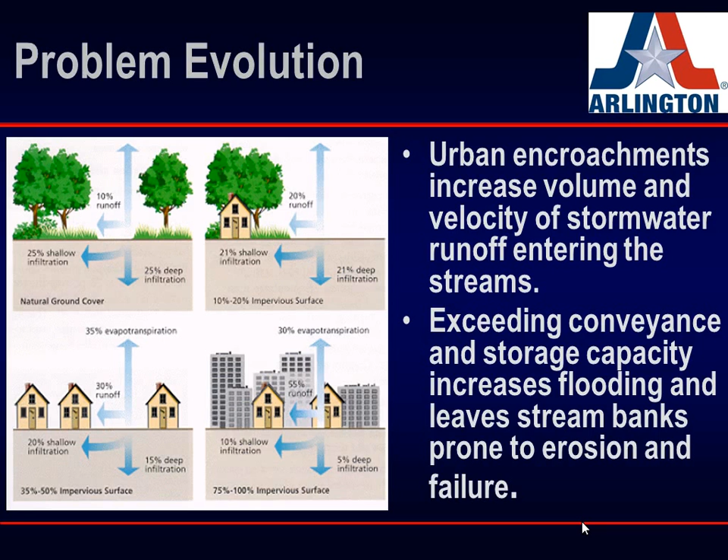So a lot of what has happened with our systems has really dramatically changed based upon the changing land use information. This kind of sums it up, how things are happening and why they're changing. The other problem is this is quote an improved stream in the City of Arlington. For a long time, we were very efficient at concreting everything. So what happens is, for those of you who remember hydrology, you speed up the water, you get more volume, it changes the response of the system.

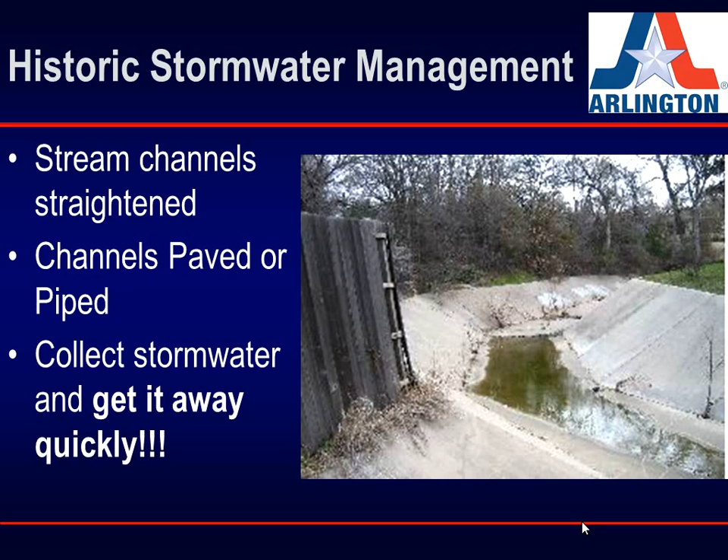So what we deal with a lot is that a significant portion of our streams in the City of Arlington were paved at one point. The idea in those days was get it gone before the flood wave comes through. Well, what we did is we sped it up so much that we had all the peaks hitting simultaneously on the main stems, making things a lot worse. Plus it led to the degradation, the erosion, and a lot of the other issues we're dealing with.

A good example of that: you look on the left, that's an area in Arlington in 1962 and 1976. There's a little bit of urbanization there. You can see a lot of houses, and that was just in a couple years' span.

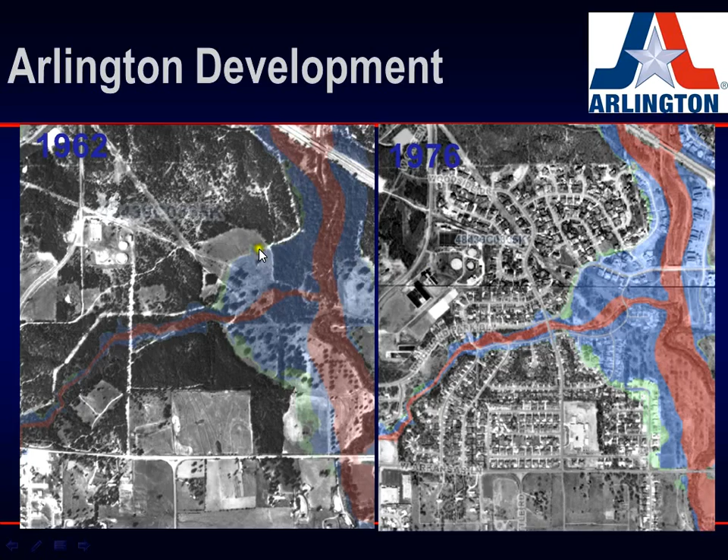Here's another example, 1976 versus what it looks like in 2009. Obviously, with the significant amount of increased imperviousness, no updates to the flood studies and everything else, we've had a lot of things changing - the flooding has increased, the water quality has decreased. The streams aren't real good about supporting any kind of fisheries anymore, and they're loaded with trash. Now that has something else to do with it because people like to dump their stuff out there, but it's not a very aesthetic aspect of a community, and people really don't like what it looks like now.

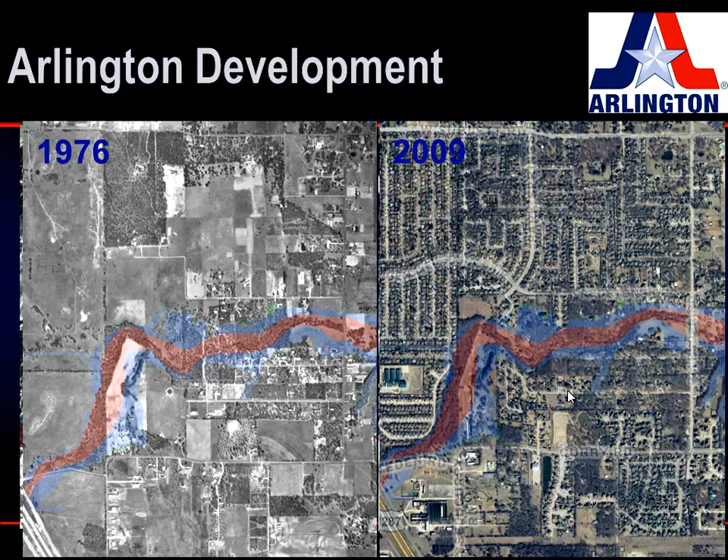So one of the things we're left with is trying to make that better. Another example here: straightening of the stream channel versus a section that wasn't developed. Ironically, the section that wasn't developed is on the Arlington Airport.

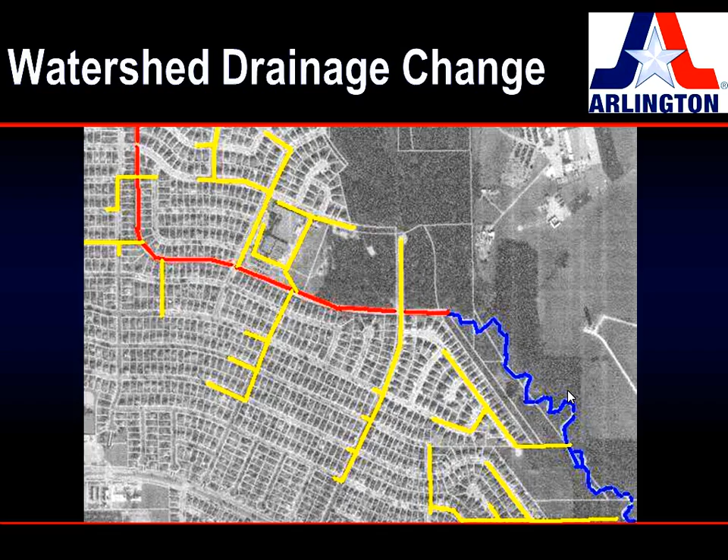But then when you add in the other aspects of it, all the storm sewers accelerating the water, we really get that water there fast and speed it up fairly well. So one of the things we're trying to deal with is slowing it down so it doesn't cause problems and flood places.

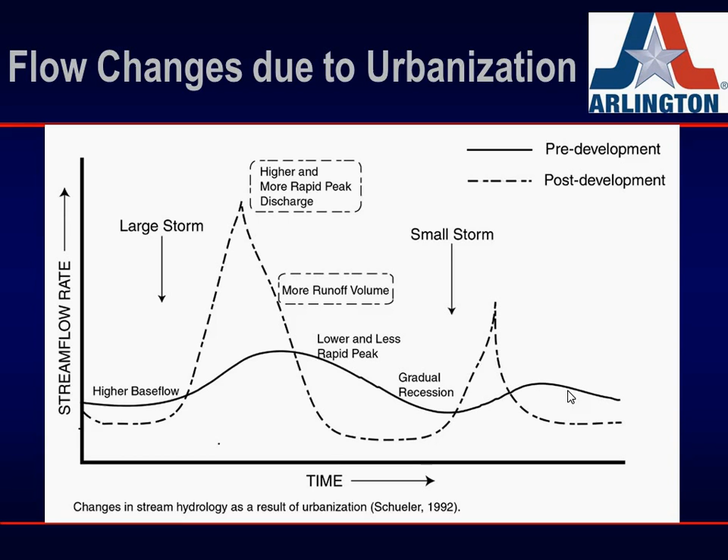There's a famous presentation from Schueler out in Maryland from 1992 showing how the hydrology changed. For those of you who remember your hydrographs from hydrology class, the solid line is what it was pre-development, and the dashed lines show what it is post-development. So you get into peaks earlier, they're higher, and they cause a lot more potential degradation to your systems.

So what do we do about that? Well, the traditional method, like I talked about earlier, is to convey the stormwater and get it away from the site as quickly as possible. We're now being forced to do things in a little more of a green fashion.

People like, and green, I always laughed about it. Somebody told me years ago, let's just spray paint the concrete green. Well, some people may like that, but citizens tend not to. It's funny, about half the citizens who call me now want me to concrete the universe, and the other half want me to tear out all the concrete. So I'm left in this no man's land of making neither group happy, which means I'm pretty much doing exactly what I'm supposed to be doing if nobody's happy.

One of the big issues is we've got to change the mindset of using stormwater as a resource. Most of you who have sprinkler systems in your yards know they've basically started limiting that. A lot of it is we either have way too much water or it doesn't exist. So changing the mindset to get people to view water as a resource, something we can utilize and retain as much as possible, is one of the things we're trying to integrate into our designs.

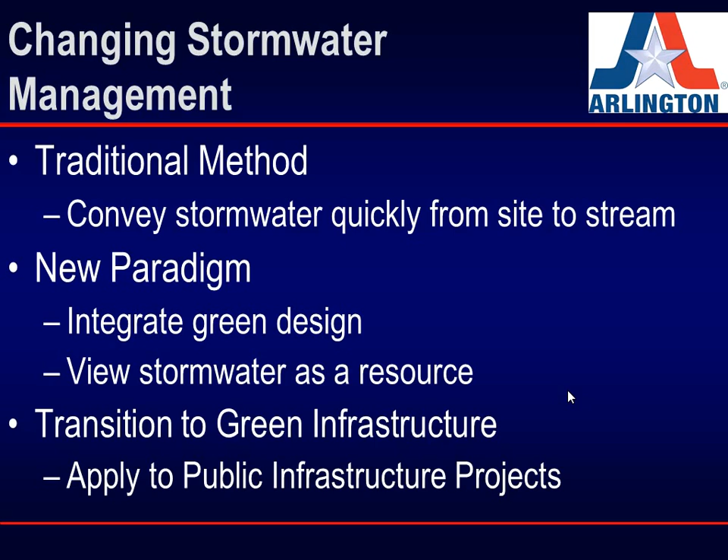We've been requiring that of the development community for a decade or longer, so now we're under the gun to start looking at it from a public infrastructure standpoint. I always laugh about it - somebody said, you guys don't do what you make us do. I said, yeah, we're kind of like parents - we tell you what to do and then do the exact opposite. So we're trying to move into that realm where we lead by example rather than just telling you what to do.

One of the infrastructure considerations we always run into, especially in stream channels and erosion issues, is everybody generally says concrete and gabions are the solution to all problems. There are a lot of times when they are a good solution, but they aren't the end-all. So one of the things we've started to look at is whether it makes sense to use them, or if there are other alternatives we can utilize. I'll give you an example here a little bit later of what we did.

A lot of times people only address the flooding aspect of things, but if you're addressing flooding, you can improve water quality. Likewise, if you're addressing water quality for your EPA or TCEQ permit, you can do things that will potentially have minor reductions in flood risk. If you look at things incrementally, every little bit counts - every bit you take out of the system or slow down will help keep things from getting worse.

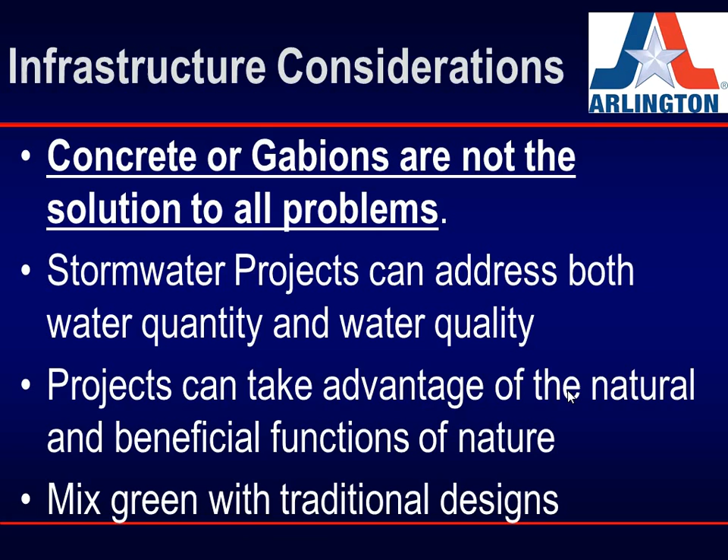So one of the big issues is, well, you can't do it all. Yeah, that's right, you maybe can't do everything on your design. So we have mixes of traditional versus green, and we start to integrate things slowly. These are some of the things we take into consideration.

I'm going to go through a couple of examples of what we've done in the City of Arlington over the last 2 to 3 years. Meadowbrook was a channel rebuild project, basically an old concrete channel that had heaved up because it was built on expansive clay soils. I did learn one thing 30 years ago when they built concrete channels in Arlington - there was this novel concept of engineering design that left out steel.

We were tearing out those concrete channels. I couldn't find any remnant of steel anywhere, so it made a lot of sense why they buckled and went the way they did.

One is River Rock Circle, a bank stabilization project to protect infrastructure. I got a really beautiful picture of a 20-plus inch main that's hanging in the bank, ready to start discharging into the creek.

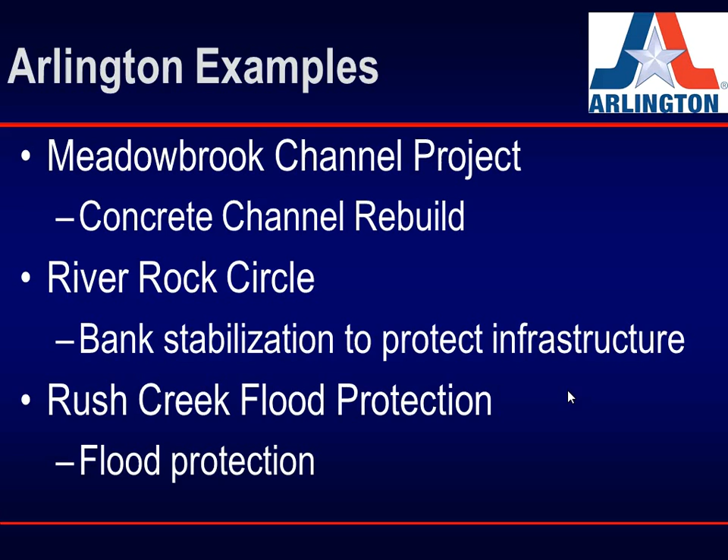Then the Rush Creek Flood Protection Project, which is a flood protection project. The first one is the Meadowbrook Channel, as I talked about, a failing concrete channel. It had flooding concerns. One of the things that happened is the concrete channel started heaving up and going every which way. It's supposed to be a nice trapezoidal channel, and I'll show you some pictures here in a second. Remember, it was supposed to be trapezoid, so that gives you an idea.

We've got a lot of these in the City of Arlington, but this is one of the worst ones we dealt with. One of the design challenges was confined space. We only had a certain amount of easement, and those of you who've had to go out and acquire easements from 40, 50, 60, 70 property owners know the horror of dealing with a project like this. So we were basically confined to the space we were dealt.

But one of the things we wanted was to find some type of water quality benefit. With all the other facilities in the City of Arlington, Jerry's, Big Dome, and the stadium, Globe Life or whatever it's called this week, based upon checks, a lot of things they're trying to do is make the place look better. So we had a directive from our city manager that we wanted it to look better.

One of the main reasons we want things to look better is concrete is a beautiful canvas for artists, and they like to paint it. We spend a lot of time out there with guys with white brushes painting over it, so it's a nice clean canvas for them to paint again. So we were trying to look for designs that were less appealing to them for their artwork.

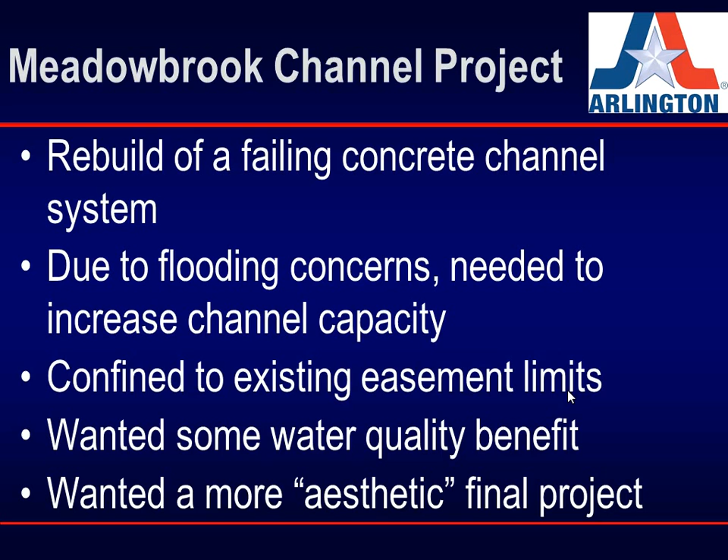These are all some of the things we had to start taking into consideration in our design. As I indicated before, this is the Meadowbrook Channel pre-development. This is actually one of the good sections where we could still see it, and it hadn't completely heaved. I did like the quick fix on the left side of the picture with the corrugated metal, God honest truth. If you look on the right side, that was supposed to be a 45-degree bank the other way, but it's heaving over.

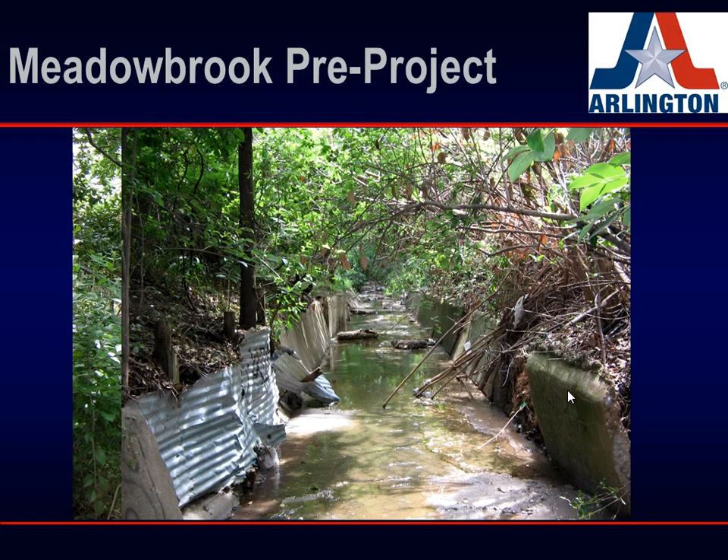So that gives you an idea of some of the issues we were dealing with from these channels over the years. You can see the ever popular solution of bag wall construction on the right. These are all things that were historically done to try to stabilize and maintain the channel.

What we ended up coming in with is a block wall. The reason we went with that design is we needed to maximize conveyance capacity. The channel was grossly undersized. We had limits to what we could do, and we went to the limits of what we could, basically maximizing the size of the cross section so we'd get the most flow through there.

But the one thing we changed up is if you look at that bottom, those are interlocking blocks. Under low flow scenarios, none of the water flows in the channel, it actually all goes down and infiltrates in. It's interesting, when the concrete section comes in, we get a little trickle of flow and it disappears. The other aspect is the blocks themselves have gaps and openings in there.

Now we put rock and sand in there, but one of the things is it starts to fill in with a little bit of soil. And those of you who know weeds, because they grow up right through every crack in the sidewalk, we had factored that in, and that's what we were planning on, because we were trying to get a bit of a green feature in there so we'd have vegetation to filter out what we could, but also catch things, work as a filter, and green it up a little bit.

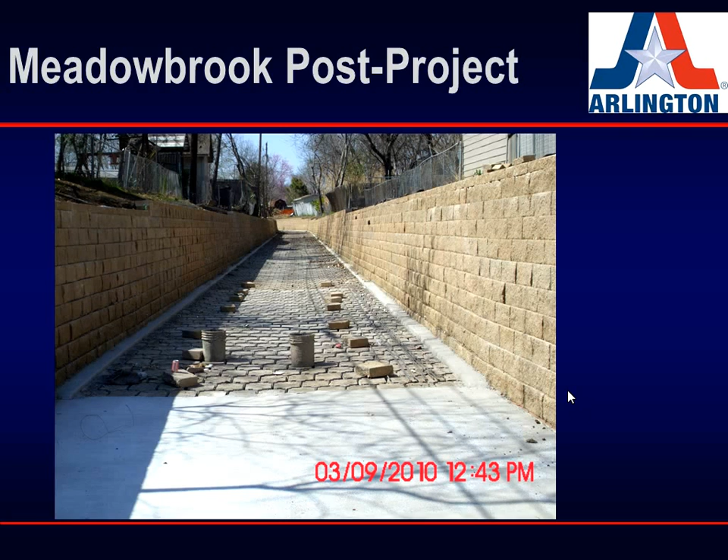One of the other reasons we talk about doing this is it makes it less appealing for people to travel down, especially those who like to walk down and climb over fences in the backyard to visit homes. So if you have it where it's not appealing for them to crawl through or walk down the channels, that was a good thing, and the police embraced that kind of concept.

Here it was earlier this spring when the grass is starting to come up, not overwhelming. We will go through there once a year and mow it down a little bit, keep it at about 2 foot high, but it'll continue to grow up.

When we have a flood event or any kind of stormwater event, the water just comes through and knocks it down. Looks like any other ditch in the Metroplex or across the nation. The water pushes it down, and two days later it's all standing back up again. But we get that filtering effect, a little bit of infiltration in there, and it does help, at least from a water quality perspective, handle the normal low-end flows.

Here's another thing: you can see how close the homes are encroached in there, which gives you an idea of the constraints we were dealing with here. Now, there were a lot of people who wanted us to put it in a box culvert. Well, cost-wise, that was kind of prohibitive on our part, so we rebuilt this. This came out to be essentially the same as we would have paid for concrete.

So for the aesthetic aspect of it, we figured out that people don't like to spray paint these walls. It messes with their artwork, doesn't give them that nice smooth canvas. Plus, we get the water quality perspective, and we get a small amount of infiltration going back into the groundwater and into the soils there, so it does help stabilize it a little bit.

Another project is River Rock Circle. This is a severe erosion near a sanitary sewer. There was a previous Gabion project there that had failed, and it was only three years earlier that it had been worked on. One of the big issues, because we were exposing so much of the line, was we were worried about 404 permit issues. Anytime you're dealing with over 700 linear feet of a creek, the Corps gets a little cranky.

Who hears from the Corps? Okay, I can badmouth them all I want. One of the big issues is we were trying to avoid a Corps permit, an individual permit. We didn't want to pay for mitigation. We were already paying for enough. We didn't need an additional cost to pay for somebody else.

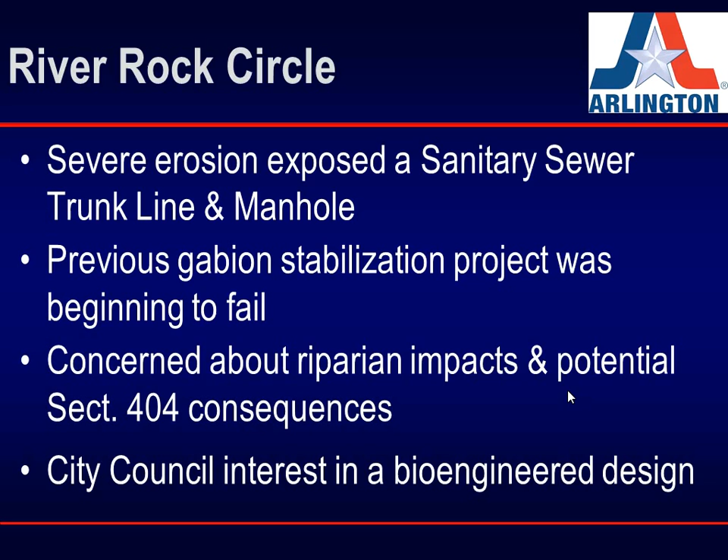The other thing is the city council there had one member who was really excited. She wanted to see a bioengineered design, she was demanding we do a bioengineered design. So we had political support, which is usually the thing that basically kills most of these efforts. We came up with a solution, a design, and worked through it. It was a design build option. We're allowed to do two of those per year under special circumstances, and that's what we went with.

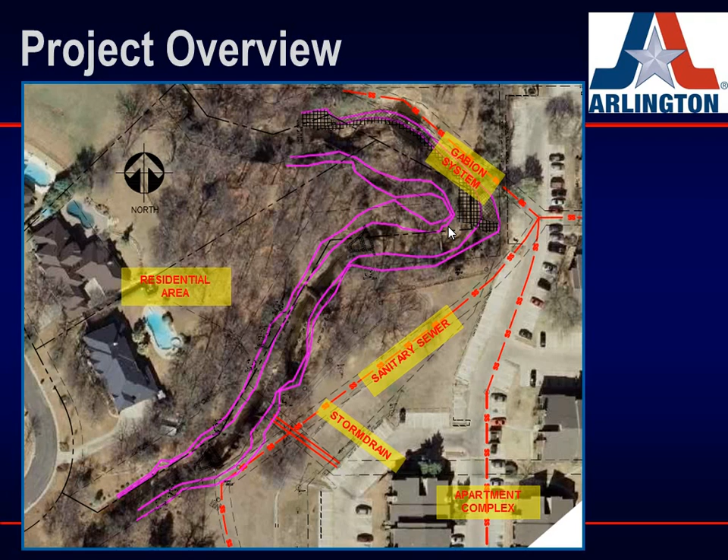The reason we went with it is, as I look here, the creek was kind of a unique situation. This red line right here is the sanitary sewer, and you'll notice the encroachment of the channel itself. We also had a storm sewer outfall coming in here, and this is the area that had previously failed, so this was starting to fail again. We were trying to identify and basically stabilize this whole corridor in this hairpin curve, so to speak, and come up with a good way to stabilize it that was green, that was stable, and wouldn't have the continued issues we were dealing with.

This is what we started with. Beautiful, isn't it? Now, most people, it's not real clear here, but this apartment complex here, the fence up there, that was their third fence. The other two are somewhere down the Trinity because they fell in and just flowed on down. So they weren't real happy with us about the status of the creek.

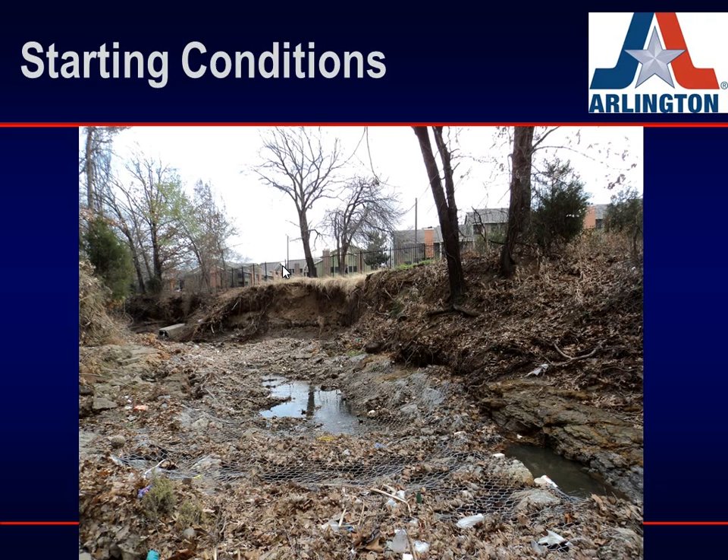One of the issues is it keeps coming closer and closer. Now, if you notice here, another angle of it, but see this little red blob right there, if you can see it? That was a 27-inch sanitary main, and just to the right of it was the manhole. That's why we were getting concerned, because we felt if we lost any more of the bank, it was hanging there, and we were afraid it was going to buckle and start discharging straight into this tributary.

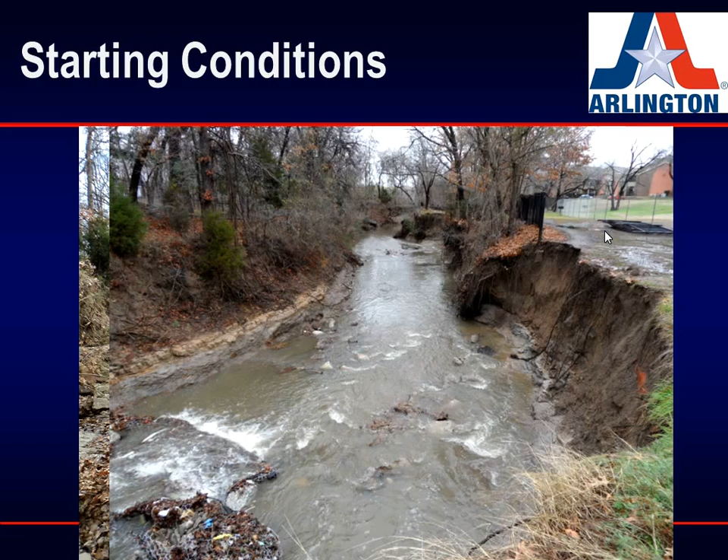People get cranky whenever stuff shows up downstream. They don't like seeing toilet paper floating in creeks, it's just something they're kind of irritated about. So we were trying to avoid that. Again, you can kind of see the fence here; this is when they lost more of it. So this is a situation we're trying to stabilize and deal with. How do you deal with something like this? Traditionally, you come in there with gabions and go to town, piling rocks like there was no tomorrow.

We came up with a different idea on how to do that. As we were moving along, we kept eroding away. You notice the line here starts to become more exposed. In the interim, we put a lot of riprap right at the toe, tried to stabilize it under low end so we didn't completely lose it. But we were in that design realm and had to get permission from the Corps.

This gives you an idea of the before and after aspect. You can highlight the tree there - the left one is before, the right one is after. I won't go into the gory details of the design itself, but the neighbors and people in the neighborhood were ecstatic. They thought this thing looked great.

There were a lot of unique features about it. We stabilized the soil using earth anchors. We did a lot of interesting things to it. But one of the things that helped out is when it was done, it's green. And that's all they wanted - they just wanted it to look semi-natural.

Now granted, no stream is that perfect slope like that, but if you look here you can see the little plates - these are actually earth anchors with plates. We have a geotextile mat that's got openings in it so grasses can grow through, and it's anchored in there with deep anchors. So it's structurally sound, it's tied in there tight.

We also used limestone blocks cut specifically for our situation to create a series of drop structures or weirs so we can handle the grade and slope of the channel. Rather than having that shooting down, we have a series of cascading pools. It worked out fairly nice in that aspect.

This is probably the best example of the cascading pool in operation. The thing has taken some fairly heavy flows - we've seen water over this weir about 4 feet deep. We haven't had a real big storm yet, but we've had several good enough to show that it's fairly stable.

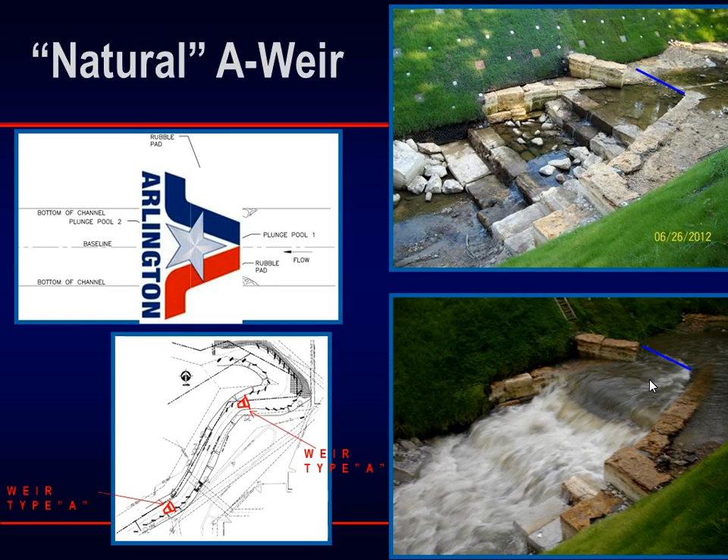Now, the one thing about this natural A-weir is one of my engineers, she took great pride in this design because of how it looked out - being the City of Arlington, it matched our logo. So you can have a little creative aspect of your designs and put a stamp on for the City of Arlington in that sense. The problem with us now is they're changing our logo, so we're going to have to potentially redesign these in the future.

Again, before and after, so you can see how this thing works out. There are a lot of features that were taken into consideration, but when it was all said and done, it was kind of greened up, and the neighbors liked it. The irony about this one is there are 3 city council members who live in this neighborhood, and all 3 were very intimately interested in this project. All 3 had high praise.

So usually whenever stormwater, we're the bad guys because everything we do causes problems - erosion and flooding and everything else. We were on their good side this time. We gained credibility over it because it was something that looked like an asset to the community and to that neighborhood.

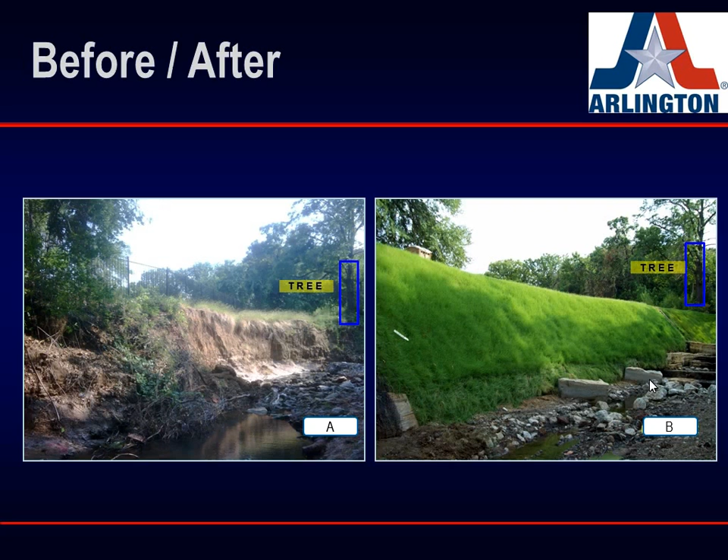Some more pictures - again, you can see the earth anchor blocks. They give you an idea of how the thing was stabilized. One thing is you go out there today, and we've given a lot of tours to a lot of municipalities and various groups in recent months, and over the last year.

Every time we go out there, you see fish, and much to the chagrin of some people, snakes, and turtles and everything else. So we are getting a fisheries and a natural community growing back in that stream that was not there when we started the project almost 2.5 years ago.

One of the big benefits is it's kind of natural, but it's engineered natural. So it does stabilize and will withstand a lot of erosive forces. We do have to occasionally do some minor tweaks, but we haven't really had to do much of anything over the last 2 years since this has been put in. It's much more pleasing to the people who like to see things more grassy than concrete. And if you spray paint this channel, we don't worry about it - we just mow it down.

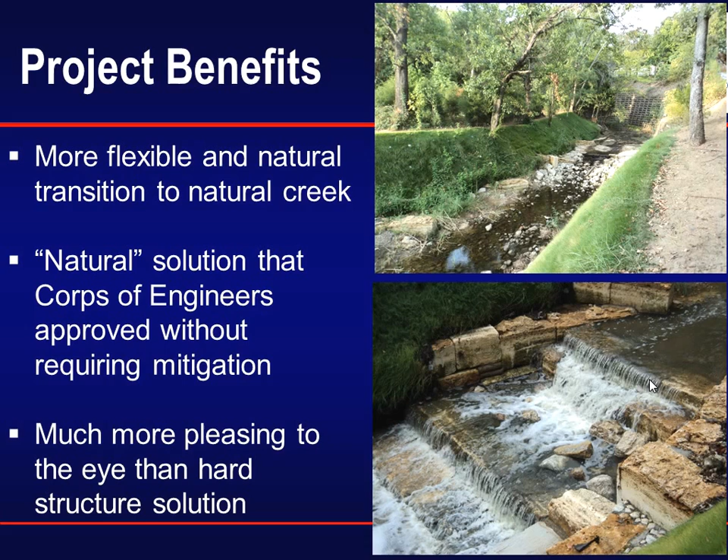One of the big things people talk about with green design is that it's much more expensive. When we got all said and done, we did the original design of this design-build, and it came out to about $1 million.

We had some changes because we had a flood event that made us change our design, since we lost a lot of soil and had to buy more material. Final comparison to Gabions, which is what we were planning to do, showed we were about $100,000 cheaper than a Gabion design. So on this specific project, not to say all of them will come out this way, we were about $100,000 under what the Gabion design would have been. So from our situation, it's probably about the same.

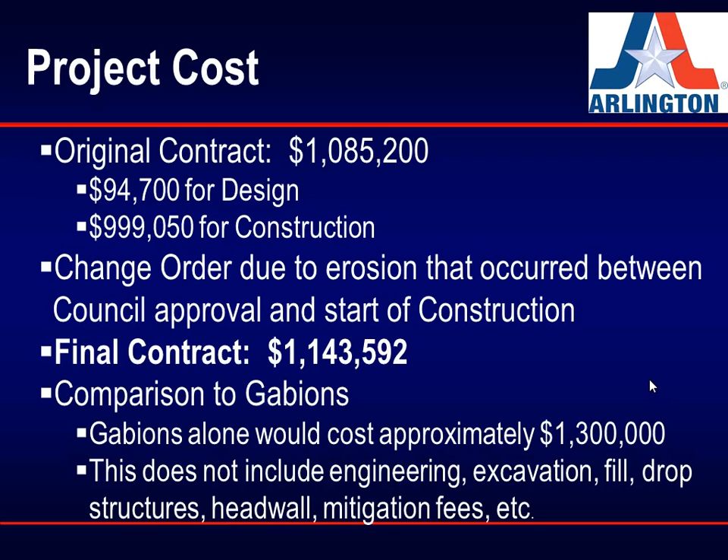Rush Creek is an interesting project because it was an area of historic flood losses for several years. We had done several studies to look at this area. Who here remembers Hermine in 2010, and Fox News with the helicopter over the apartment complexes and condominium complexes in Arlington, and me thinking, I don't want to be anywhere near there because I don't want to be on Fox News.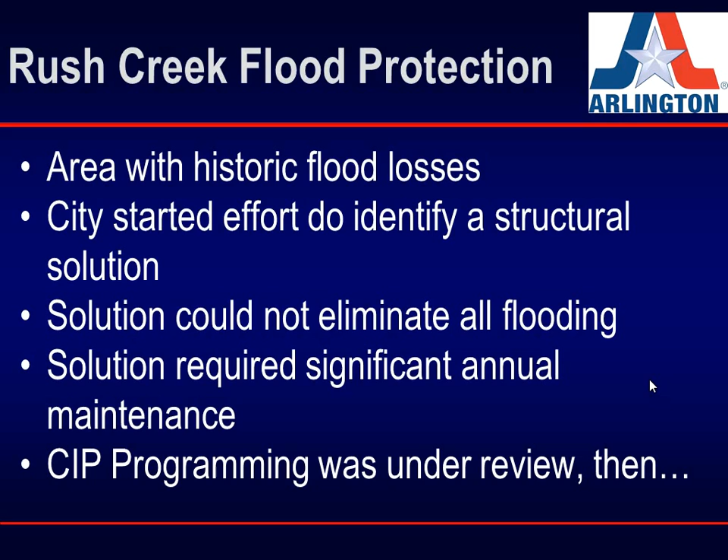It was one of those situations where we had a lot of flooding issues. There had been an ongoing study to try to identify ways to address the flooding. There were several alternatives, and there was actually a sound engineering design that would have addressed it.

This is probably the most interesting story about that whole process. The fire department, Swiftwater Rescue, were going out there evacuating people in the neighborhood because they got trapped when the water came up too fast. Most of them were elderly people who had little warning, and we didn't want them driving through the streets because the water was fairly deep—4 feet or more.

So they're going in there with their little boat, and the outboard clipped a mailbox and sheared the pin. In the meantime, the motor won't run, and they see this jet ski floating down the creek. Lo and behold, there's keys in it. They reach over, the thing fires up, and they commandeer it. So these firemen were basically going up and down the neighborhood rescuing people on this commandeered jet ski—then the best part was seeing them towing in their Swiftwater rescue boat later.

Again, a lot of damage, a lot of issues we were dealing with. So what do we do? One of the big issues we were dealt with is there were a lot of people who were substantially damaged. How many of you out there know the FEMA rules on substantially damaged homes?

Well, I know you would, Gary. Basically, what most people don't realize is if a home is identified in a special flood hazard area—a floodplain, zone A, AE, V, or whatever—and it suffers more than 50% damage, with the damage being based on the value of the structure, not the property, it has to be rebuilt in compliance with current regulatory standards. In the City of Arlington, that means elevating all utilities and finished floors to a minimum of 2 feet above the base flood elevation.

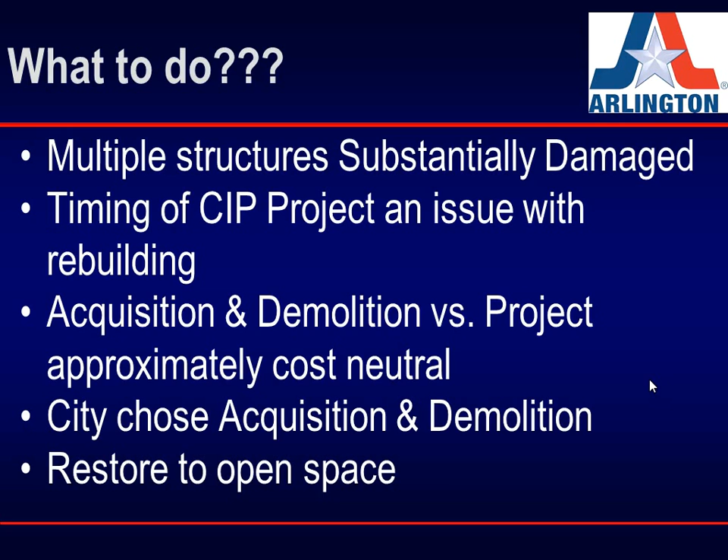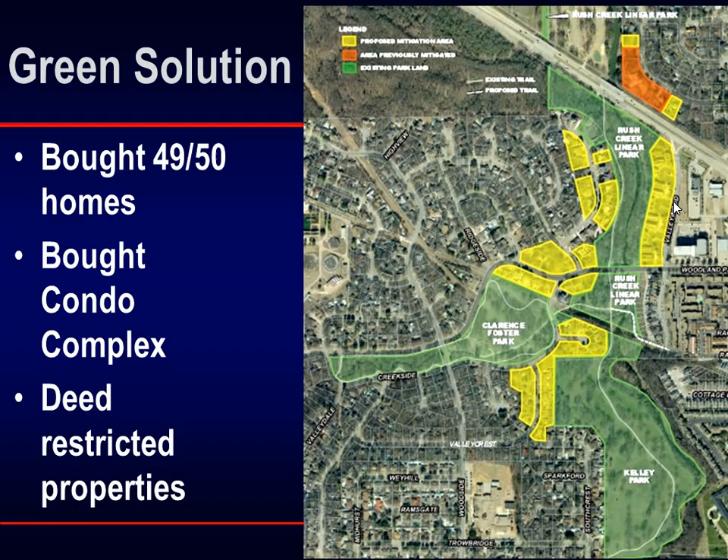Probably the most controversial aspect of this whole design process, you'd think buyouts would be. No. We took the old roads for the subdivisions out, and essentially we cut off somebody's cut through. Now, everybody else was excited because there's now trails through there. As an asset, they don't have to worry about getting run over by the 16-year-old in the pickup truck speeding off to school. Once people understood what we were trying to do to make an asset, they were very excited about it.

We always laugh about it. There was one guy here in the middle - he had built the house up, he had acquired the property through foreclosure, he was a builder, he built the house up and everything else. He was very against all of it until he realized he was going to be the sole island surrounded by park everywhere. And he became the biggest champion of the project you ever saw, because he had one heck of a yard. So, there's some interesting aspects of it.

We know a lot of the people we dealt with up in here, and they are all solid supporters of it. One of the things people were worried about is the property values - if you take out all that property tax revenue, it's going to hurt the city. But one of the things people are starting to realize is, if you take those houses, which lose value because they keep flooding, and you turn it into assets, these houses are good and this is a big park value - their home values go up and that offsets it. There's arguments that you actually offset more by the rise in value than you lose from the flooding.

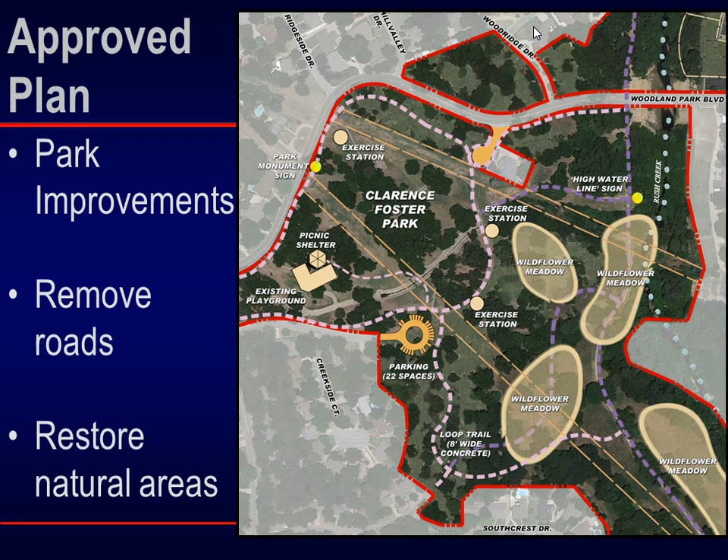So when we looked at it, it was pretty much a net zero. As far as the capital project, it was almost dead even, the capital project versus this. The break point was the annual maintenance costs of the capital project. Part of the reason we had gotten into the situation we were in was because of the maintenance needs of it. So when you look at the long-term life expectancy of the projects, it may make more sense to make the problem go away rather than build something. So we started looking at the BC aspects.

One of the big issues I talked about, trying to figure out how to make things green - as somebody pointed out, well, the only green thing they knew was Kermit the Frog. My kids reminded me of his song, 'It's not easy being green.' So I stole his lyrics. But that song ends up saying it's okay to be green, it's okay to try to do it and be that way. So that's what we're trying to do. We may not be able to do it every time on all of our projects, but it's now a design consideration that we deal with.